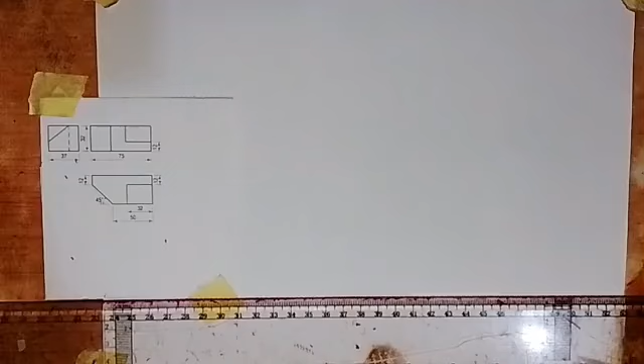So what I'm going to do first is to construct an isometric cuboid of length 75 millimeters. Then we have the width to be 37 millimeters and the height is 32 millimeters. From there, I will carve out the isometric view of this object. So let's go and see how this can be done.

So what we are to do first is to draw a short horizontal line. So here I have a short horizontal line here, and with my 30-degree set square being set on this, I'm going to draw a line. So I will draw a line in this direction. Then I'm going to set it like this with the same 30-degree set square.

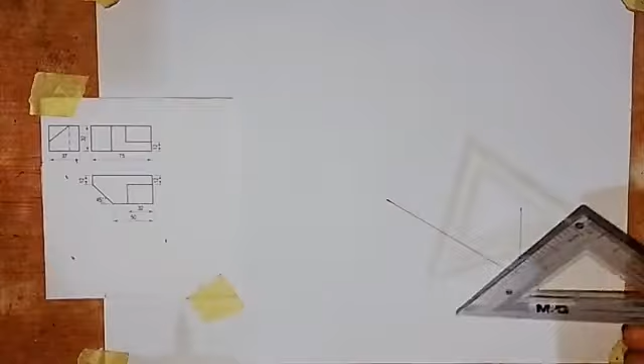I will draw a line in this direction, and at this point here, I'm going to draw a vertical line. So draw a vertical line from this point up. So this is the vertical line. So on these lines, I will take dimensions that I need. Okay, so first of all, we have 75 millimeters on this side. So from this point here, I will take 75 millimeters to this side.

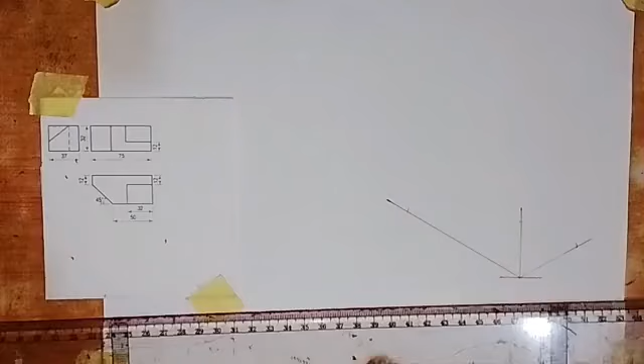This is 75 millimeters. Then on this line, I will take 32 millimeters up. So this is 32 millimeters. Then on this side, I will take a measurement of 37 millimeters. So this is 37 millimeters here. So at this point here, I'm going to draw a vertical line. So I will draw a vertical line here at this point up like this.

Okay, then coming to this point also, I will draw a vertical line up like this. Okay, then with the 30-degree side of the set square, I'm going to draw a line. So from this point here, I will draw a line to touch this line. Okay, then I will turn it to this side like this, and then draw a line from here. So draw a line from this point to touch this line.

Then I will also set this in this direction. So I will draw a line from this point here. I will draw it and it goes like this. Okay, then turning it this way, I will also draw a line from here to touch this line. All right, so I've created an isometric cuboid.

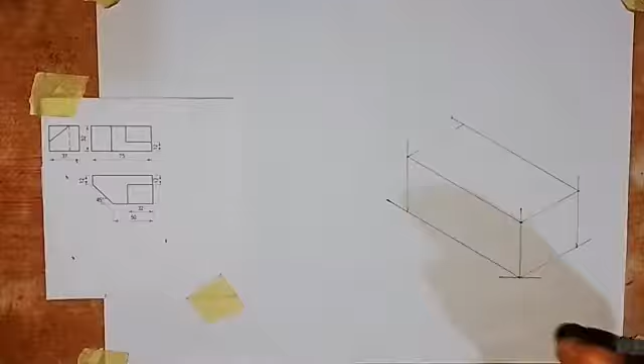Okay, so what we are to do now is to work out what we have here. I want to start with this feature that we have here. So on the front elevation, we have this line at this point, and then this surface that we have here is meant for this point that we have here. All right, so let's work that out.

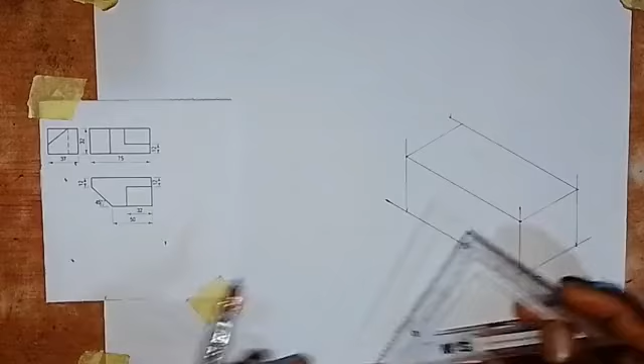So from here to here is 50 millimeters, and from here to here is 12 millimeters. So let's work that out. So from here, I'm going to take a measurement of 50 millimeters from this point. Okay, from this point here, I will take 50 millimeters. So here is 50 millimeters here. Okay, we have 50 millimeters.

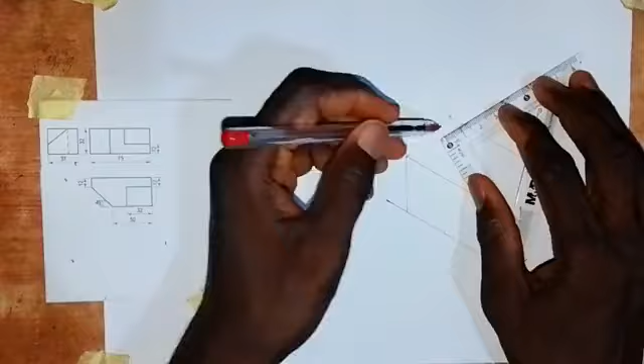I will come to this point here. I'll take a measurement of 12 millimeters from this point. Okay, so 12 millimeters to this point. We have this to 12 millimeters. So at this point here, I'm going to draw a vertical line. I will draw a vertical line like this. So this vertical line goes up. Okay, that is the line that we see here.

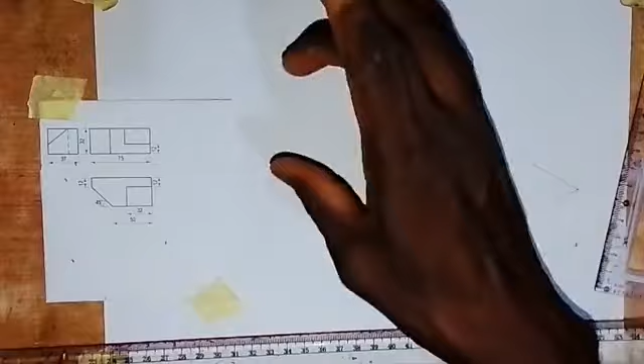Okay, so then I'm going to connect these 2 points. I will connect them together like this. All right, so that is what we have there. So this one is taken off, and that will make us see the surface that we see here. Now you may be thinking that we should draw a vertical line from this point. If I try to draw a vertical line from this point, it will fall on this line. So we don't have to draw a vertical line there.

Okay, so when we are looking at it in this direction, we see the surface here, as you can see it here. That is how that is going to be. Now let's come to this point here, with what we have here. If you look at the end elevation, on the right side here, we are looking at the object in this direction. So we are going to see this surface. We are going to see this flat line.

Okay. Now, for this flat line that we have here, the distance from here to here is given from here to here as, okay, I'm looking at that. So it's given as, okay.

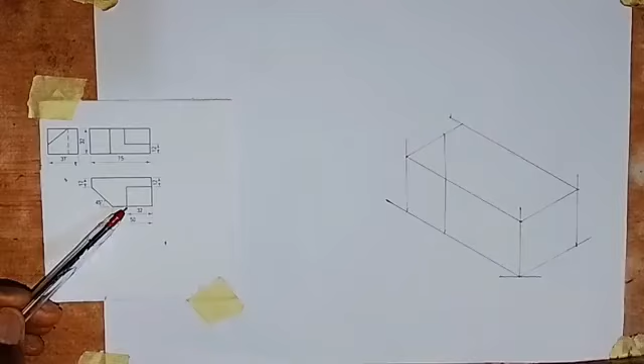Okay, let's work out the distance from here. Distance from here to here is 32 millimeters. But I need to get this 12 millimeters first. Okay, so I'm going to take a measurement of 12 millimeters from this point up. This is 12 millimeters here. So I'm going to transfer this 12 millimeters, okay?

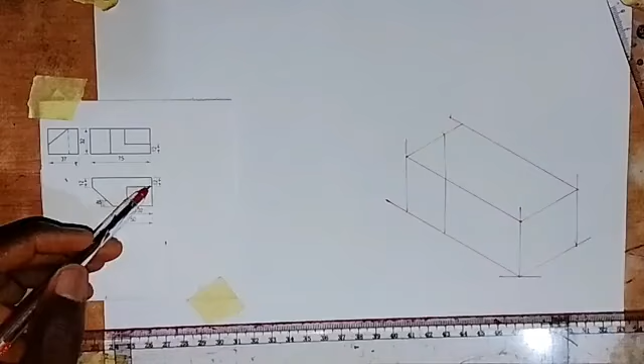All right, so we also have this 12 millimeters here in the plan, which is up here. So we have to take that 12 millimeters from this point. So we take 12 millimeters, this is 12 millimeters. So we are going to connect these 2 points together like this, okay? So we have this now.

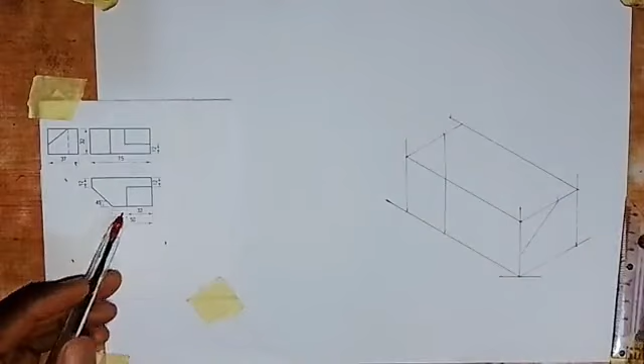All right, so then this 32 that we have here. First of all, I need to draw a line from this point with my 30-degree set square. So draw a line from here to this side. So I will now come and take that 32 millimeters. From this point, I will take a measurement of 32 millimeters to this side here. We have 32.

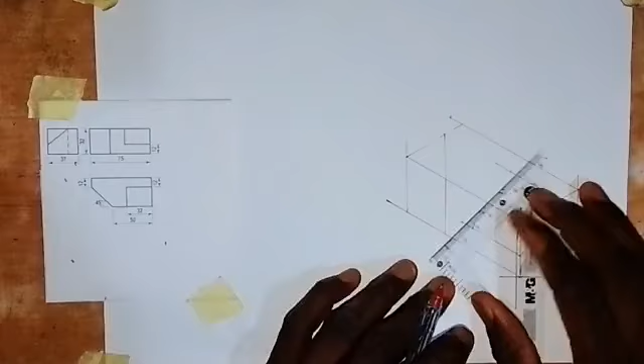Okay. Now, this one of 12, I have to take it in a bit. So we take it in like this. So we have this now. What I'm going to do now is that I also need to take a measurement of 32 from this point forward, to this side. This is 32 millimeters. So I'm going to join these 2 points together, making it a thick line at once. So we have this now.

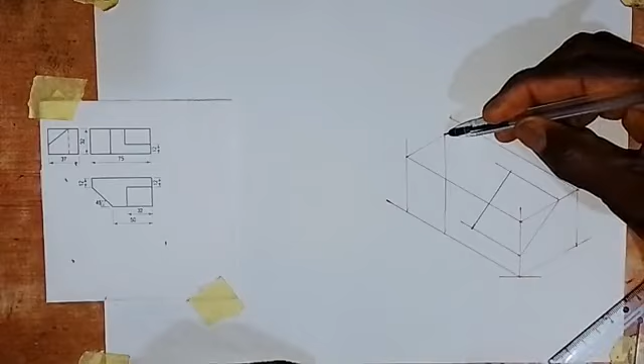Okay. So looking at what we have here now, the object has been completely drawn. So on the end elevation, there's a line at this point that is hidden from us. If I'm looking at it in this direction, the line will be hidden. And if you look at it, from here to here is 12 millimeters, from here to here is 12 millimeters. So they are on the same line. So the line will go like this. At the back here, it will be hidden from us. So this flat line that we have here is what we see here.

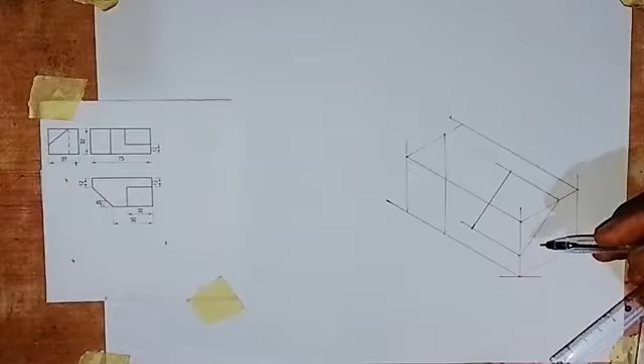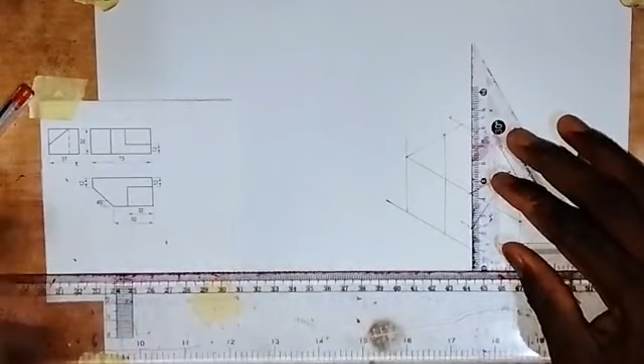Okay. And then there's something that we have here. So there'll be a line along this path. From this point, we need to draw a line from here to touch this. Okay. So we have this now. Then we are going to connect these 2 points together. So this rectangular surface will be shown, and that's what we have done here. So you can see how simple it is.

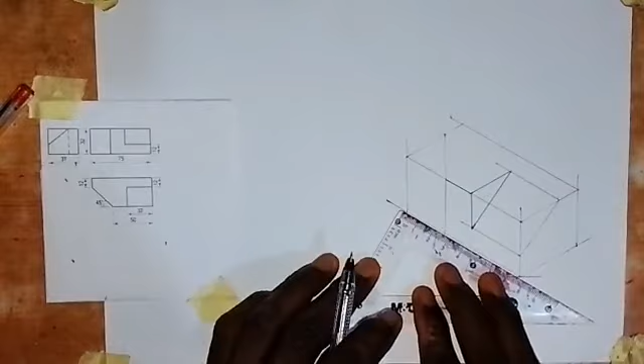So what we just need to do here right now is to make this line a thick line like this. Okay, then we come down here. So we also make this line a thick line from here to this end. And then this line also, we need to make it a thick line from here to here. And this line we make a thick line from this point to this end here.

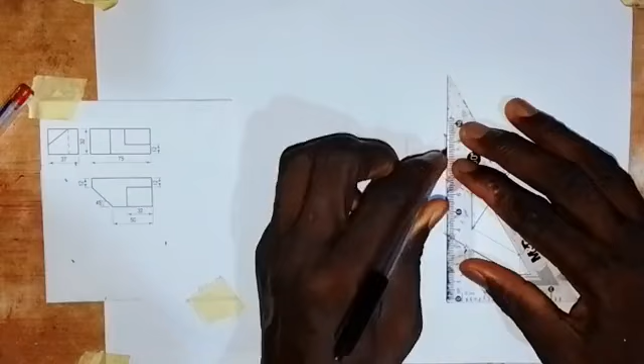So we have this. Okay, then this line will be a thick line. So you can look at them. They form a straight line, but they are different lines. So this line is also a thick line from here to here. And then we also make this line a thick line from here to here. Then this line we also need to make it a thick line from here to here.

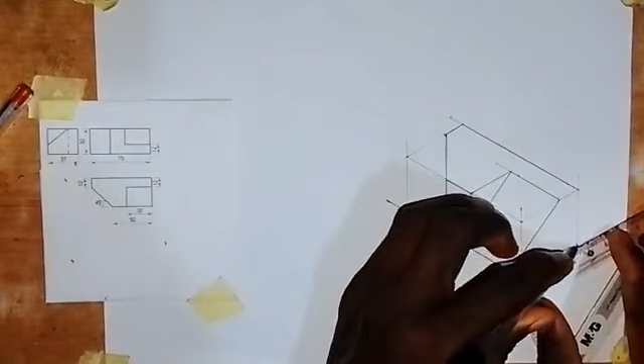So we make this one a thick line from here to here, and then this should also be made a thick line from here to here. And then this line, we also make it a thick line from here to here. So looking at what we have here, this is the isometric view of this object. So we need to make this line a thick line from here down.

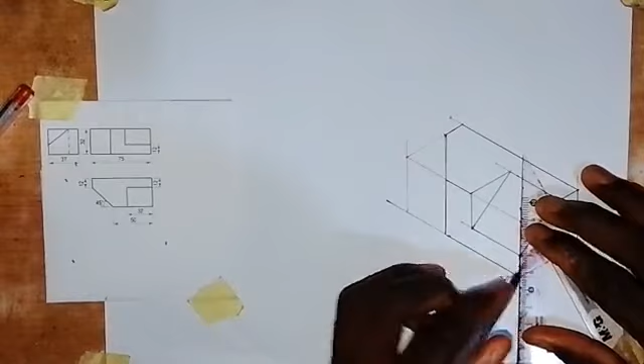All right, so this gives us the isometric view of this object whose orthographic views are given in first angle projection. As simple as I've done it here, all you have to do is to practice. With practice, you become a master at this one.